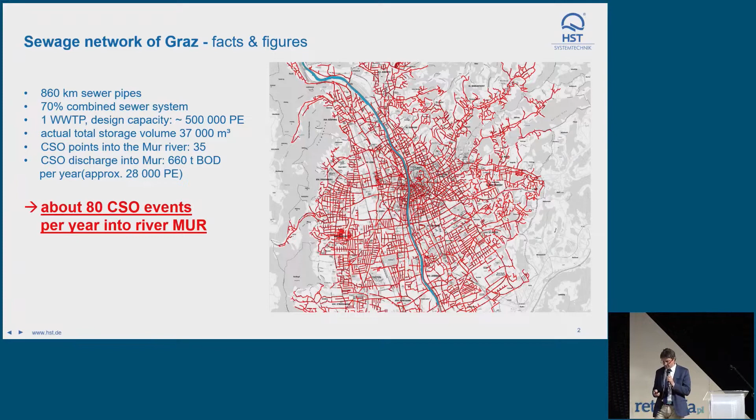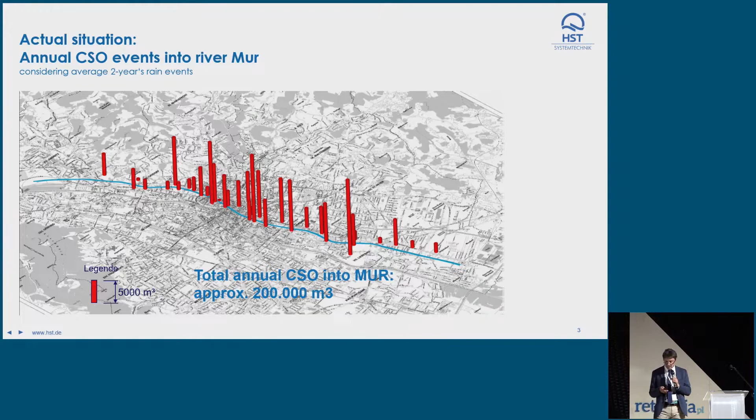These amounts come from the CSO points along the river, the 35 points, and they dispose about 200,000 cubic meters of combined stormwater and sewage into the river, resulting in about 660 tons of BOD, which was no longer accepted by the people, because this river is heavily used for recreational purposes, fishing, and these kinds of things.

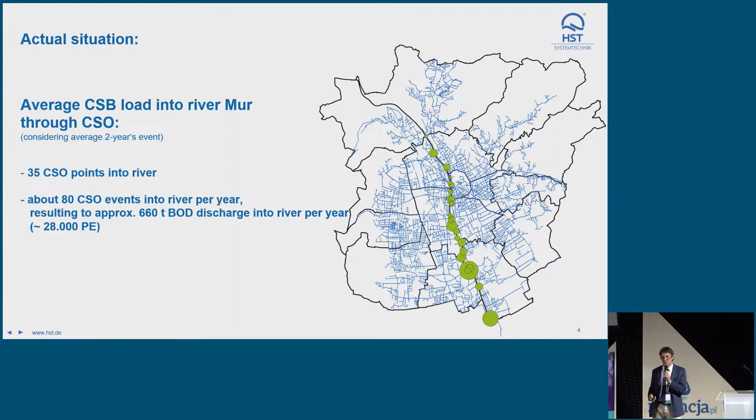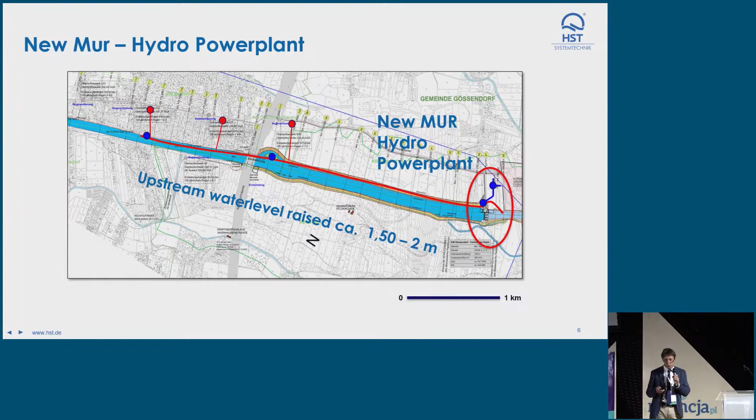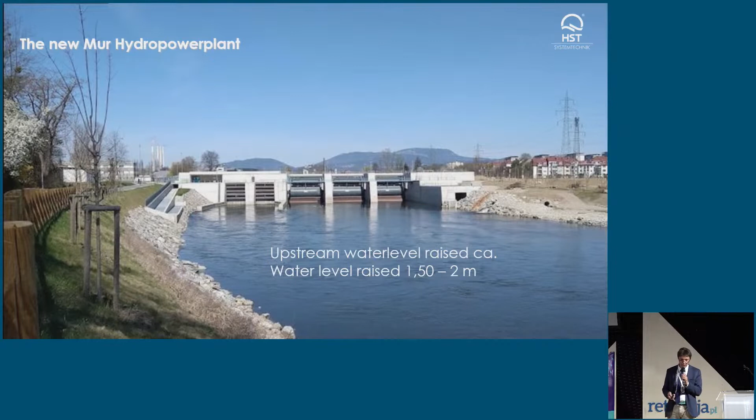An additional challenge to the city and the river was the construction of a new hydropower plant that raised the upstream water level about 1.5 meters. This is the new hydropower plant, about 18 megawatts, built between 2017 and completed in 2019.

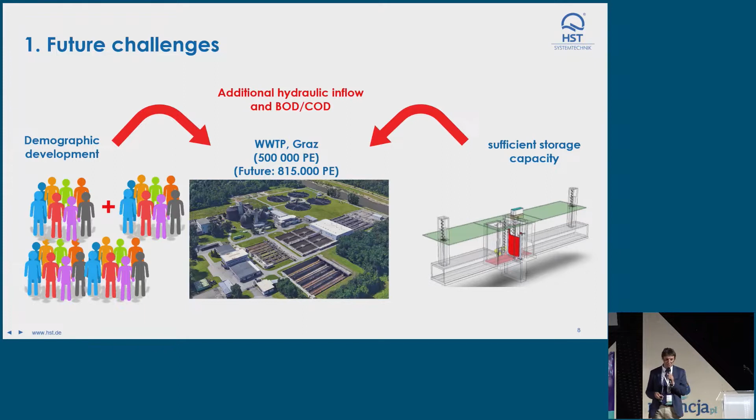An additional challenge is the demographic development of the city, which has been continuously growing. Now it's about 350,000 in the city center, plus population living in the urban areas. But it's still growing, and they need to be prepared to cater for about 800,000 plus population equivalent.

So what is the problem? The first problem was created after the construction of the hydropower plant, which raised the water level. 18 CSO points that previously discharged into the river were submerged, underwater, and could not discharge anymore. 3 more CSO points were still downstream, after the new hydropower plant, so this was not a bigger problem.

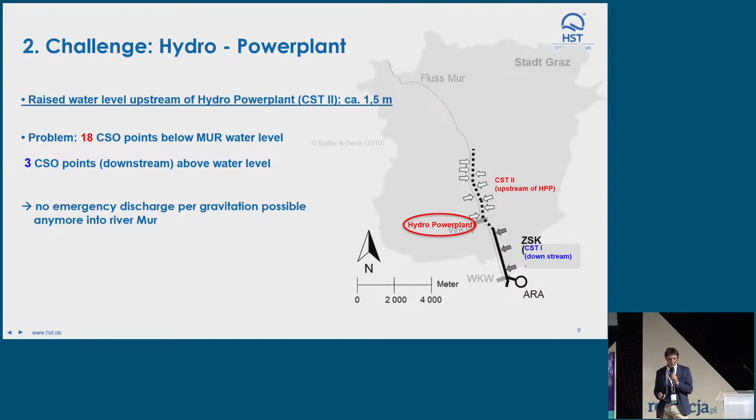So no emergency discharge by gravitation was possible anymore into the river. This picture shows the city and the river, and the solution was to build a central storage tunnel along the river, creating an additional storage volume of about 100,000 cubic meters.

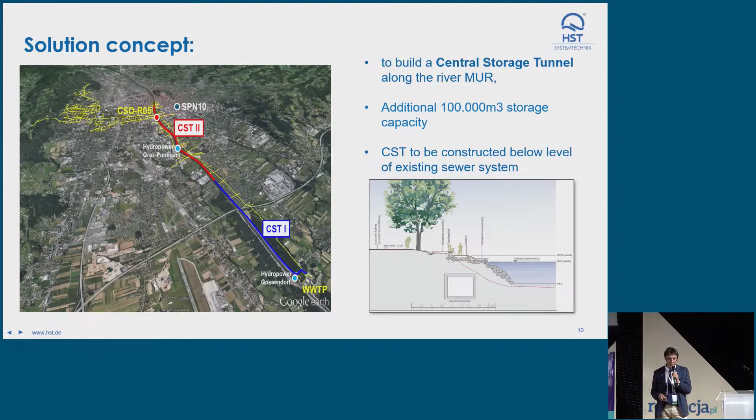The central storage tunnel was constructed below the existing sewer network, about 1 to 3 meters lower than the normal sewage network. The length of the new tunnel is 8.4 kilometers. It was built in 2 phases. The first phase was about 3.2 kilometers, next to the water treatment plant, which was at the end.

This hydropower station is about in the middle section. 21 of the total 35 CSO discharge points end up spilling into the tunnel, creating an additional storage volume of about 94,000 cubic meters.

But this deep storage tunnel does not work without some mechanical or technical machinery that sits in this tunnel, which is very important. In order to activate the full capacity of 94,000 cubic meters, there was a need to construct so-called cascades. 7 cascades were created.

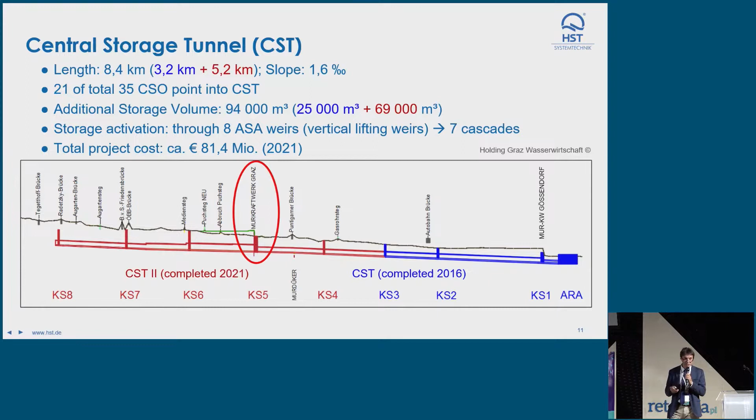The main function of the central storage tunnel was first to ensure drainage in the long term, despite the 2 hydropower plants. Up to about 80 cubic meters per second can be discharged into the Mur River during a 100-year precipitation event from the connected CSOs upstream of the hydropower plant.

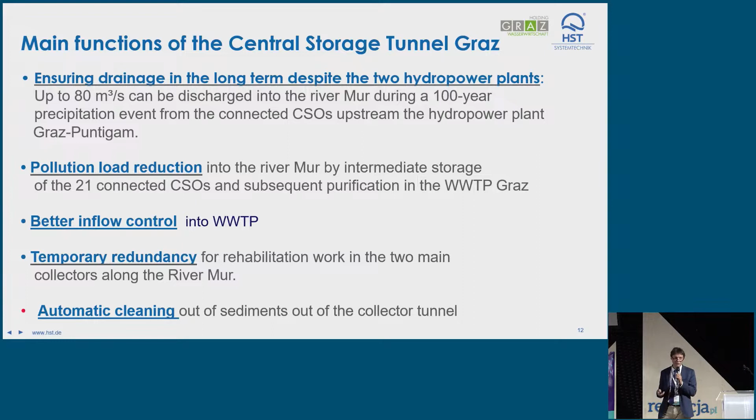Secondly, the pollution load reduction into the river, but also better inflow control towards the wastewater treatment plants. Also important for maintenance is the temporary redundancy for rehabilitation work in the main collector. Another goal was for this tunnel to be automatically cleaned of sedimentation, because there was, for certain reasons, quite a lot of sand and gravel loads that spill into the tunnel.

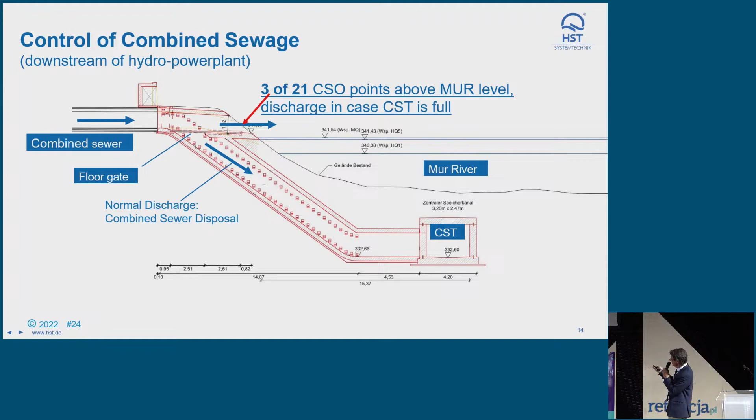Here you see 3 of the 21 CSO points that are above the river, and the water level of the River Mur downstream of the hydropower plant. Usually all the water is now collected down here in the central storage tunnel by a floor gate. When the tunnel is full, it opens, or it closes, and the water is discharged directly into the River Mur.

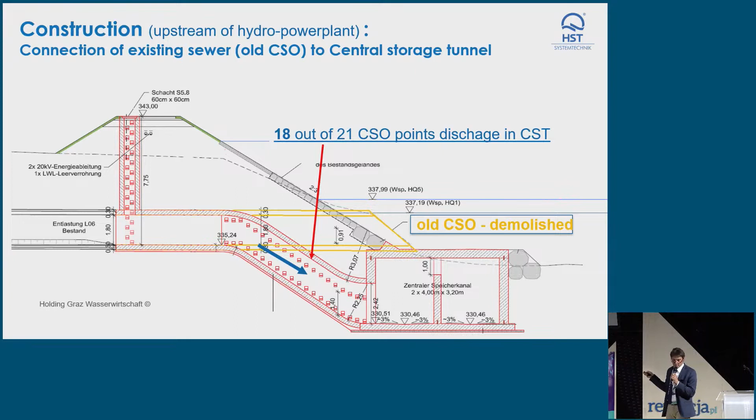18 out of the 21 CSO points discharged were submerged after the building of the hydropower plant. Here is the old CSO point, beneath the water level. So what happened? They closed it, demolished it, and made a connection from the existing sewer system down into the newly built deep tunnel.

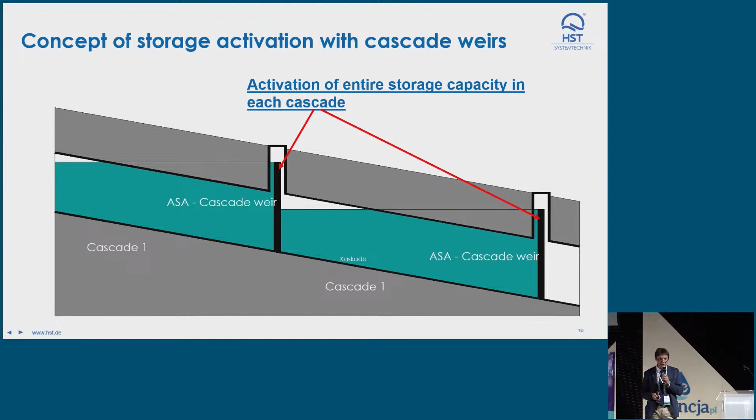The concept of storage activation with cascading weirs, as mentioned, activation of the entire storage capacity requires these vertical lifting weirs. We call them ASA weirs, automatically operated and controlled by water level, flow, and other parameters. Here you can see in this picture how it works.

It moves into the ground, and when it opens, these cascades hold the capacity. The function is, besides activation of storage capacity, also flow and level control, as well as creating a surge flushing of sediments, because on a regular basis there's a cleaning function, creating flushing waves that move sediments downstream towards the wastewater treatment plant.

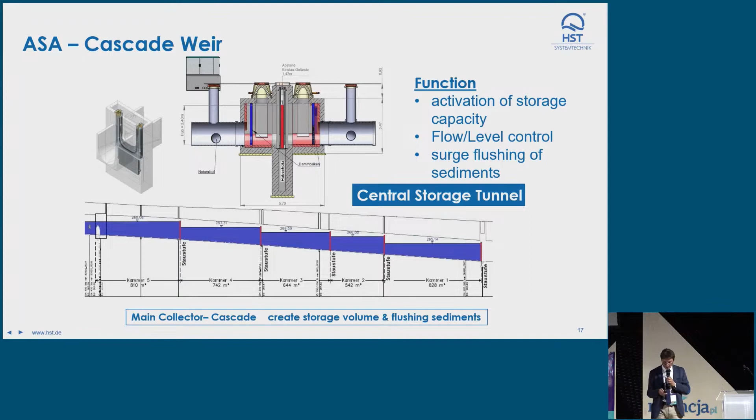Here you can see the main dimensions of these vertical lifting weirs: the width is 3.6 meters, the maximum height is 6.5 meters, and the moving speed up and down is about 7 to 9 meters per minute. It's important that it moves down quickly, otherwise it cannot create a strong flushing wave.

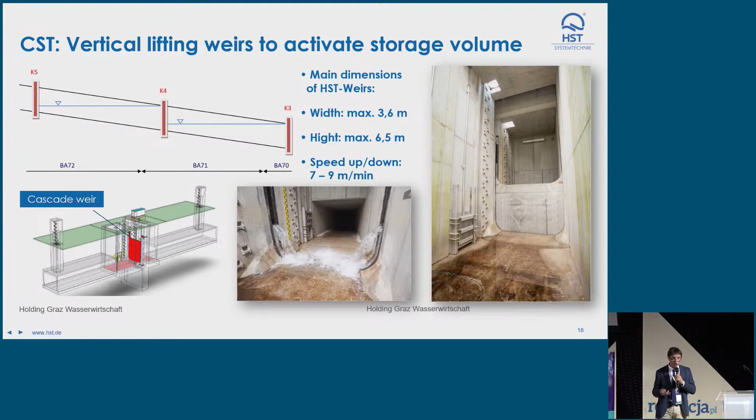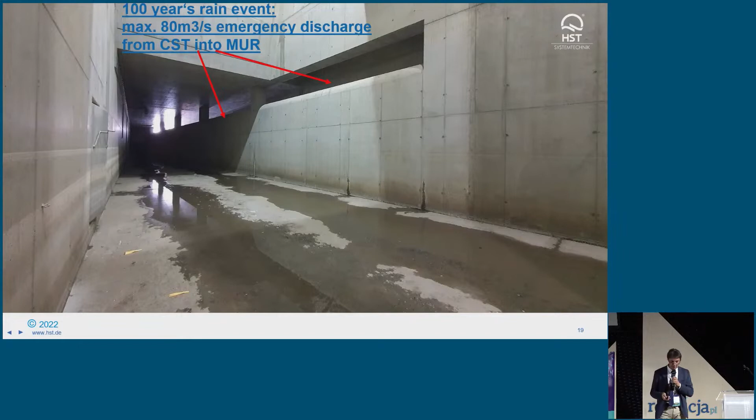If the tunnel is full, for example during a very heavy rain event, and it needs to discharge into the river, there is an overflow immediately downstream of the hydropower plant that can handle up to about 80 cubic meters per second. This is also measured and monitored for how much volume is discharged. Here is the outflow of this discharge point just downstream of the power station.

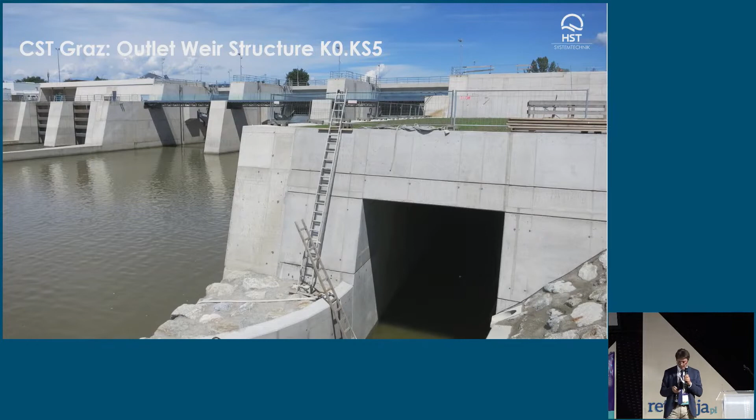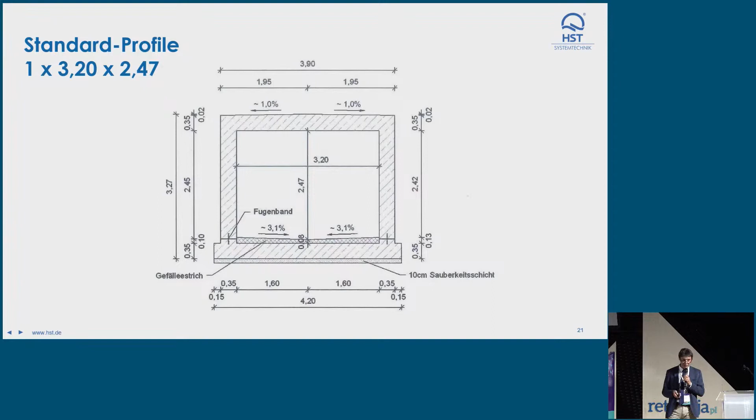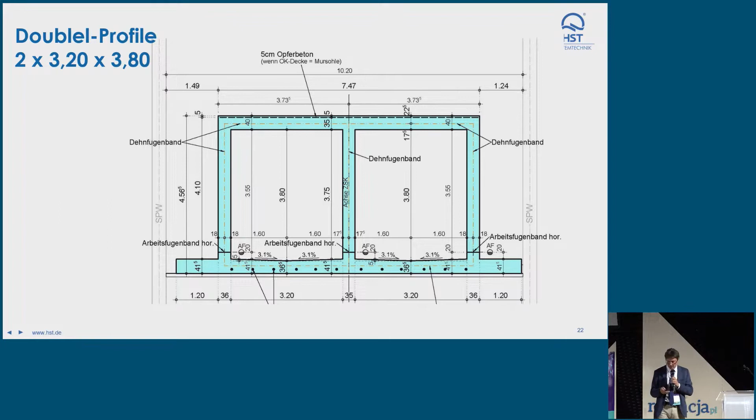Mainly they used a standard profile to build and construct the tunnel, 3.2 by 2.5 meters. On the downstream section they used a double tunnel to increase capacity, using the same dimensions, doubled. This also has to do with the civil construction, making it easier and cheaper. Here you see one of these cascading weirs when it is closed.

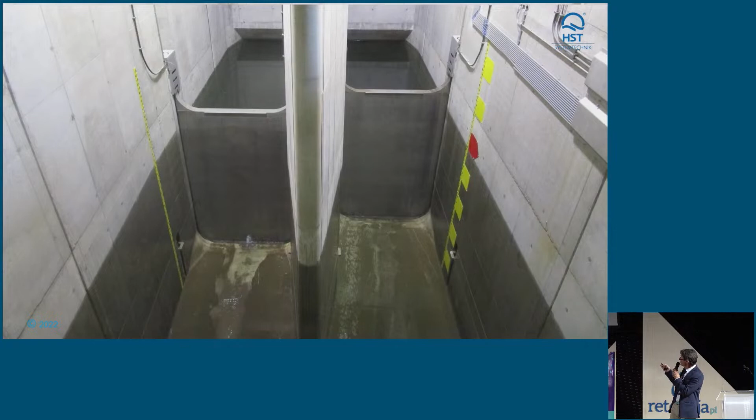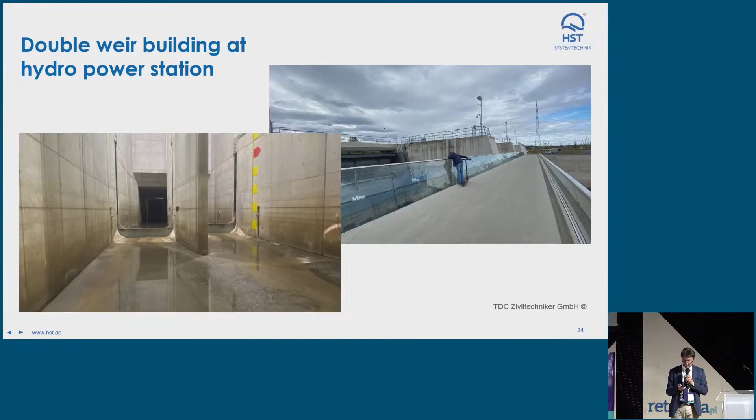There are level meters, level sensors upstream and downstream. Here is another view, on the upstream side of the power station.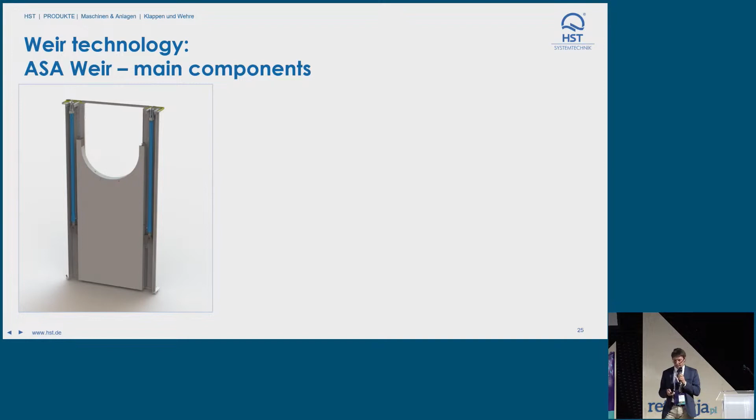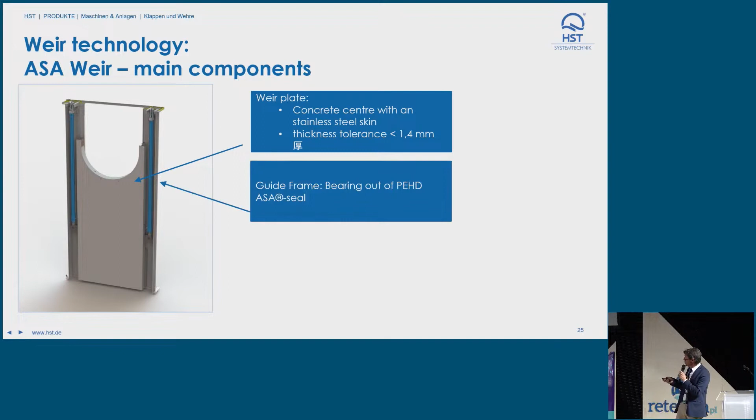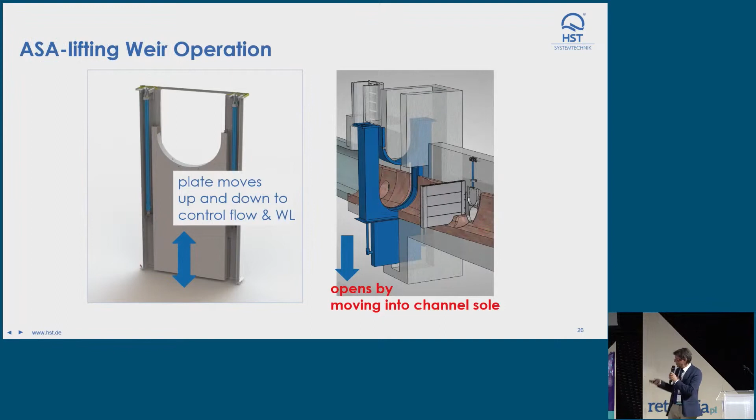Now just a few words on the technology of the ASA weir. The main component is the concrete weir plate that moves up and down. It's constructed from solid concrete with a stainless steel skin, powered by two hydraulic cylinders, right and left, sitting in a frame. They move up and down, and when open, there is no obstruction of the flow path at all.

It is controlled everywhere. Every weir of the 8 units is controlled by Nivus water level sensors, evaluated by a PLC that sends the signal to the overall control box software, which sends back preconditioned signals, operating the weir and sending control actions to the ASA weir.

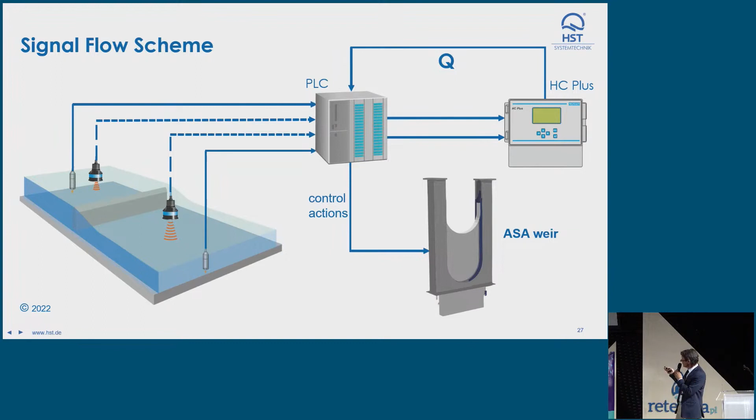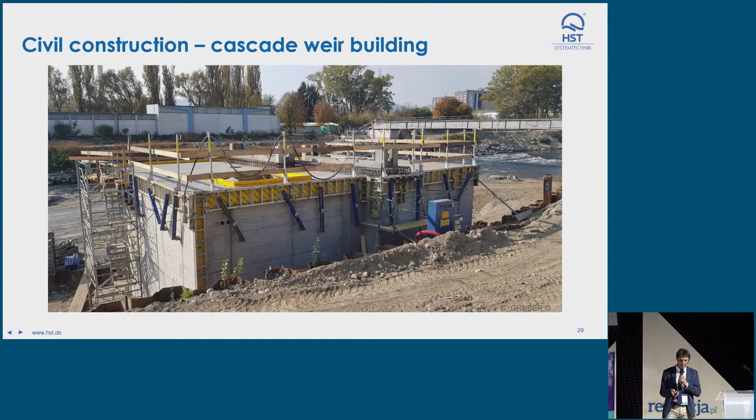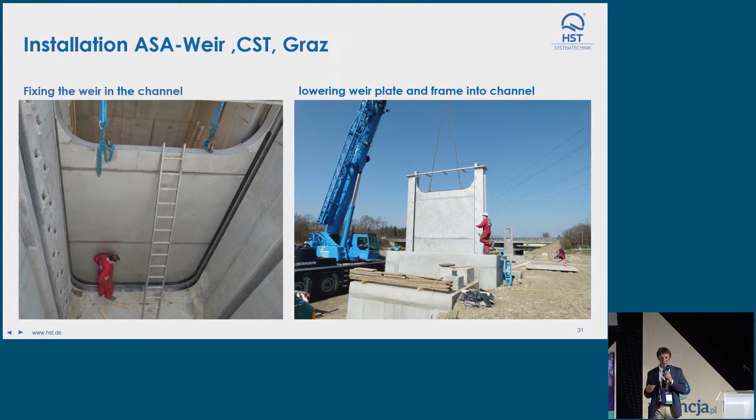So, the civil construction, just a few more words on how it looks. This is one of the buildings constructed to house the vertical lifting weirs. The weirs are installed more or less in one piece together with the frame, lowered from top to bottom. Installation, if the concrete and site are prepared well, takes about 3 days for one of these weirs.

During construction there were some technical challenges: protecting the flora and fauna, and challenging soil conditions. The construction concept used sheet piling, Spundwände in German, built in an open construction. They used in situ concrete pouring, completing on average about 42 meters per week.

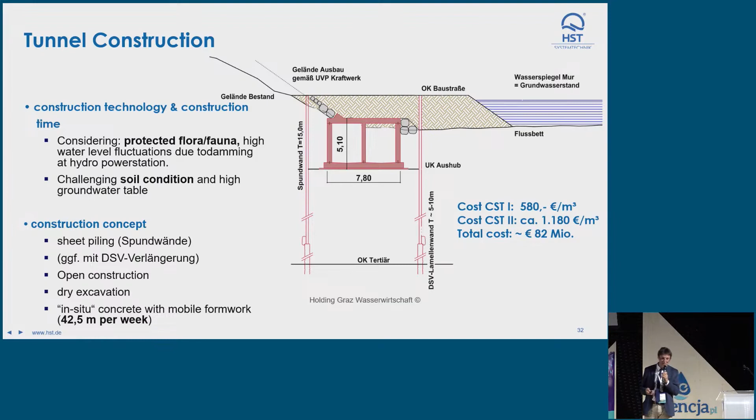The cost for the first phase was about 580 euros per cubic meter, and for the second phase, mainly the double channel, about 1180 euros per cubic meter. This ended up in a total cost of 82 million, which was even beyond the budget.

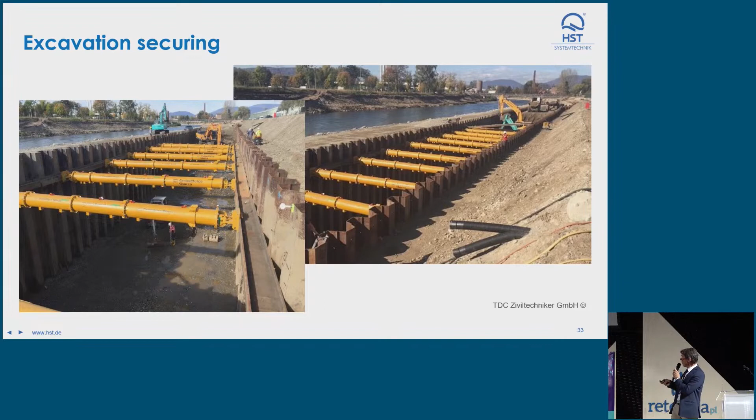Now here at the end, some impressions of the construction of the tunnel: the excavation next to the river, and the reinforcement and floor slabs, all done very properly with very good project management.

So now the conclusion: after almost 2 years of operating experience, pollution reduction is now about 80% less into the River Mur. The safe and reliable emergency discharge out of the Graz sewer network has been secured and established, along with more operational flexibility and improved flow management into the wastewater treatment plant.